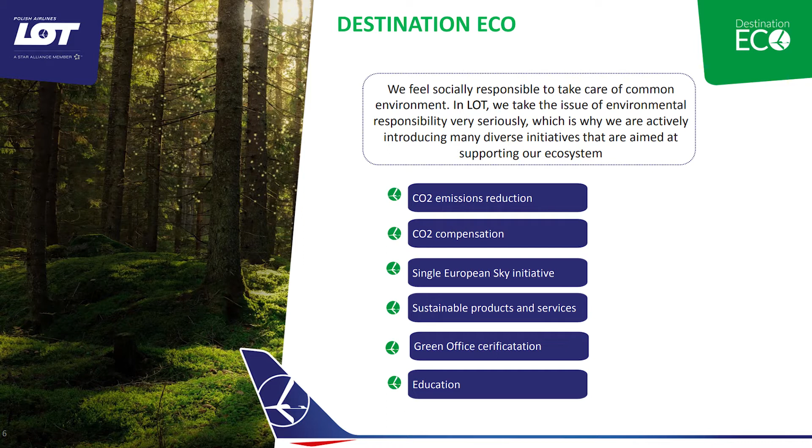Moving then to fuel efficiency. Please let me tell you about the key challenges concerning the fuel efficiency program. As it was mentioned, in 2017 we started implementation of fuel efficiency policy in our company. At the beginning of the project, we established a set of several initiatives that were based on the best practices, things that were already known in the industry, called fuel savers.

The potential savings were only estimation, and it was very difficult to say whether the actions that we had taken were actually working or not. Month by month, as our network and fleet grew, we started to face more and more difficulties in maintaining already recognized initiatives, not to mention implementing new ones. Due to variety of manufacturers, aircraft types, models and many different data sources, data collection became a challenge for us.

We spent most of our time generating data instead of analyzing it. Also, aircraft avionics software are not free from errors, which led us to the point where we weren't able to cover all of our fleet. Another challenge that we were facing was communication with pilots. We believe that pilots are the key players in our fuel efficiency program, and without their cooperation, it is impossible to have a successful fuel program.

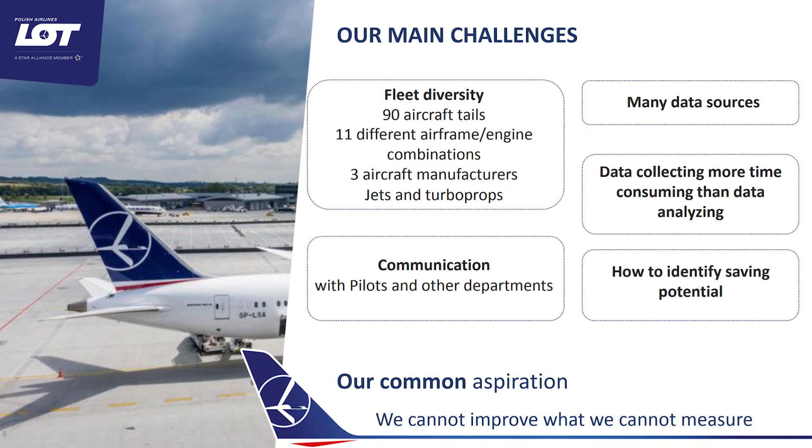However, being aware of the imperfection of the existing solution, we decided to look for a software that would allow us to move the center of gravity from the data collection to data analysis. We were looking for a game changer. To find the best solution that will let us move forward, we established our needs. We needed to monitor our recognized fuel efficiency initiatives and have the possibility of creating self-developed analyses, define targets, goals, and KPIs for compliance monitoring of each initiative. I spoke a lot about troubles with data, so obviously data integration and verification was one of the top priorities.

Engaging pilots in our fuel efficiency program was also high on our list. We wanted to present them their personal results versus others, as well as show areas and ways for improvement. Many of you can probably relate to everything I just said. At the end of the day, we all want a solution that will let us analyze, implement, and improve fuel efficiency initiatives which would lead to actual savings. We all may want the same, but when we go deeper, our needs actually may be slightly different.

That's why we were looking for a software that will give us a possibility of customization. To be honest, we didn't want to buy a box, something that will have some already developed features with no room for changes. All of our needs and more were answered when we met the StorkJet team. As a result, in 2019 we started implementation of Fuel Pro.

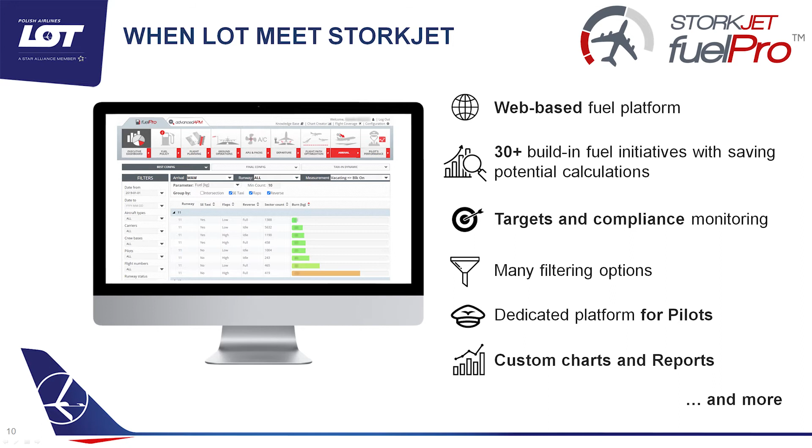Now let me tell you how implementation of Fuel Pro looked at LOT. I can truly describe it with one word: simple. Simple mostly at LOT's side, as our only job was to provide source data of proper quality, and all of the rest of the implementation was done by StorkJet. We provide quite a few data sources, and to be honest, the quality of some of them was far from perfect. Also, the diversity of our fleet meant that we had different needs for every initiative.

Considering the imperfection of our data, StorkJet had to perform a set of quality checks, necessary repairs, and outlier exclusion. After that, they matched all data sources to get one detailed piece of information about a single flight. For each flight, a set of performance indicators were calculated for every fuel efficiency initiative.

At the end, our ultimate goal was to get the highest data quality and coverage possible in one application, and StorkJet definitely met our expectations. StorkJet made the acceptance environment available already during the implementation, so it was possible to see how new data appeared in real time. At the same time, we had the opportunity to comment on the user interface and submit proposals for changes.

It is necessary to mention that the Fuel Pro environment is fully customizable. StorkJet made many individual changes in the platform to suit our fleet, operation types, and network, starting with filtering and validation options, through adding extra charts and new initiatives, ending at the possibility of creating custom charts and reports. The best part is that the time from signing a contract to a fully customized, productive solution was only 5.5 months.

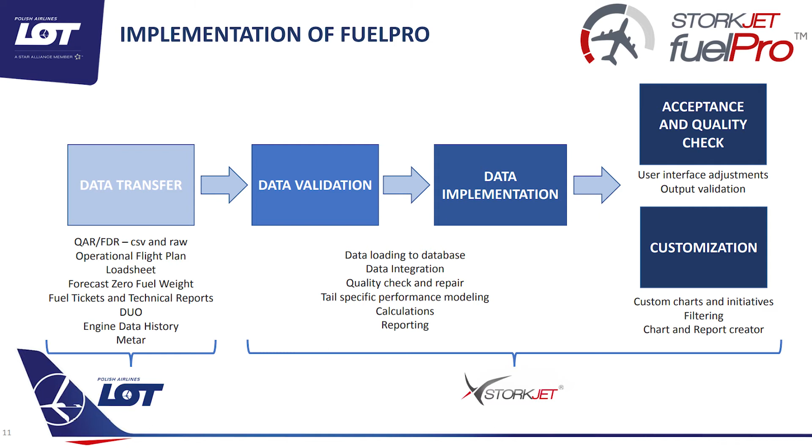Now let me tell you how we use Fuel Pro in LOT and what actual savings we already achieved. I would like to give you a little overview of how we use Fuel Pro in LOT. On a daily basis, Fuel Pro is mainly used by the LOT Fuel team. We measure, track and monitor the progress of fuel initiatives to stay on track and make adjustments when needed.

Because fuel is one of the main costs of an airline, Fuel Pro is a great tool for our management board. Through a dedicated executive dashboard, they can track fuel goals and check actual savings. Fuel efficiency is not only of interest to the fuel department, it also concerns other departments throughout the company. That's why the platform is also used by our chief pilots, fuel efficiency pilot, weight and balance, and flight planning department to let them identify areas for improvement and monitor best practices application.

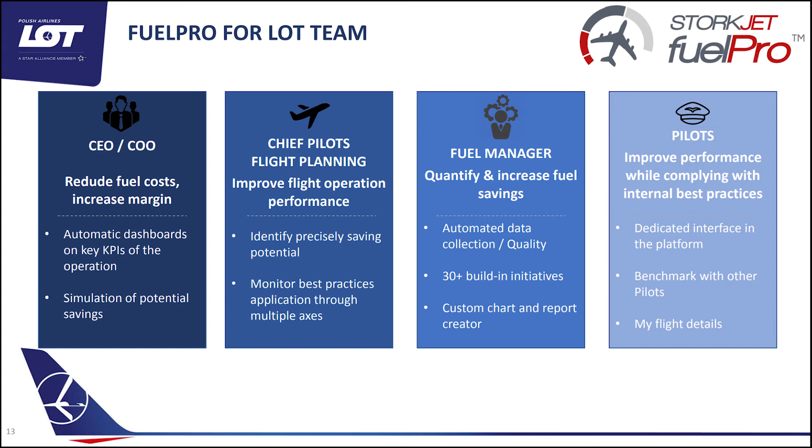And one of the most important groups, pilots. Fuel Pro has a dedicated interface in the platform just for pilots, which I will present in detail in a few minutes. Now jumping into our first case study, contingency fuel. For a quick overview, what is the purpose of contingency fuel? The basic definition states that contingency fuel is loaded for deviation from planned and actual trip fuel.

This is for unexpected factors, like deviation from forecasted weather condition or from planned route. In general, it's planned for deviation between planned and actual demand on fuel.

There are several methods for calculating contingency fuel. Basic ones being 5% of trip fuel, 3% of trip fuel or minimum contingency, reduced contingency fuel, and statistical contingency fuel.

As you can see in LOT, before implementation of Fuel Pro, for our long-haul flights, contingency fuel was planned as 5% of trip fuel.

Because we didn't have a proper software with good quality data to check it, we weren't fully aware of the situation and saving potential. After implementing Fuel Pro, we were able to change our policy and start planning contingency fuel as 3% of trip fuel.

You can see that this change is pretty visible. One year after application, we were able to save almost $2 million.

Implementing 3% contingency fuel is not the end of our story. Our next step is to implement statistical contingency fuel, and I'm sure that with Fuel Pro we will succeed and save even more.

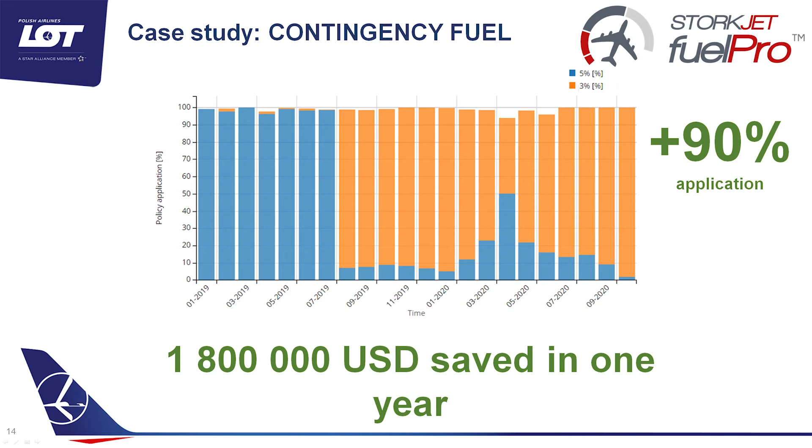Another story that we would like to share with you is about how we reduced APU usage on our 787 and how Fuel Pro helped us with that.

At LOT, we make a significant effort in reducing fuel consumption and in-flight CO2 emission on our long-haul flights. However, once the aircraft lands, we throw all of these benefits and savings out the window with inefficient ground operation procedures. APUs are a great example of that.

We knew that limiting APU usage ensures very significant savings in terms of fuel consumption and maintenance. Unfortunately, our resources weren't enough to analyze FDR data in terms of APU.

For proper monitoring, we wanted to have this data automatically imported in a software that will let us analyze APU usage based on multiple conditions, such as aircraft type, airport, or weather conditions. None of that was possible before implementation of Fuel Pro.

Fuel Pro allowed us to analyze in detail APU usage on each phase: taxi out, in-flight, taxi in, and turnaround. We started with APU usage at taxi in phase in our home base, Warsaw Chopin Airport.

99% of taxi in phases in Warsaw were performed with APU turned on. What is more, in some cases, APU was turned on while the aircraft was still in the air, even when electrically powered ground equipment was available after landing.

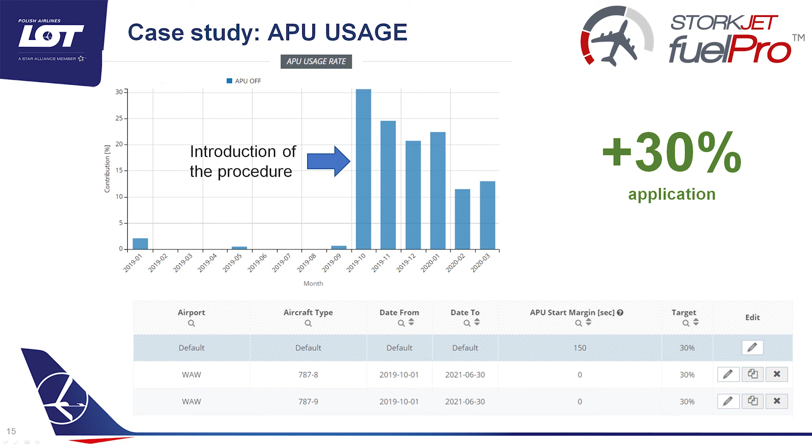On reducing APU usage at taxi-in phase, we were able to save 35 kilograms of fuel on every 787 landing in Warsaw. Our last case study is a great example of how Fuel Pro helped us with an unexpected change in the aviation world.

In LOT, we plan a fixed value of taxi fuel for every aircraft type. We always felt that this is not the most fuel-efficient way of doing it.

But like in previous cases, without a software that would allow us to analyze and, what is more important, monitor application of the changes, we remained with the functioning way of taxi fuel planning.

Even after implementation of Fuel Pro, we didn't change this policy. Knowing it might be time-consuming and savings might not be significant, we left it on our to-do list and focused on the initiatives with higher saving potential.

And then COVID happened. Travel restrictions and flight reduction led to a decrease in airport traffic. Less traffic meant shorter taxi times, and shorter taxi times equals lower fuel consumption.

In Fuel Pro, new data from flight data recorders is implemented to the platform on a weekly basis, so we were able to notice reduction of taxi time and fuel consumption immediately.

Using Fuel Pro custom reports, we were able to check our data flight by flight, compare taxi fuel consumption before and during COVID, divided by aircraft type, departure airports, sectors, time of the day, delays, runways, and weather condition.

It sounds like a lot of work, but actually Fuel Pro did most of this work for us. As a result, we could establish new taxi fuel values not only for every aircraft type, but also distinguished by departure airports. What is more, we can set targets for every airport and check application of this policy.

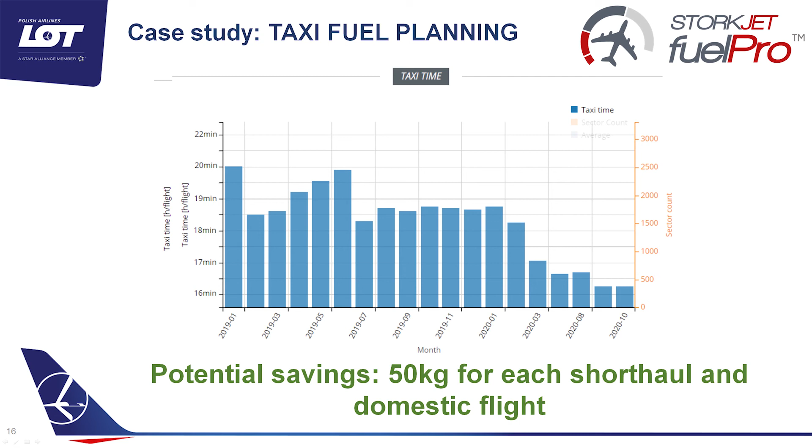At the time of this presentation, the implementation of new policy was not completed, but was in the final phase. However, we would like to share it to show how FuelPro helped us react on time and implement changes as soon as possible. With the new approach, we expect to save up to 50 kilograms of fuel for each short-haul and domestic flight.

Moving on to the last part of our presentation. As we said before, pilots are the key players for a successful fuel efficiency program. Because of that, we wanted to give them a tool with which they could check their achievements and remaining saving potential. With implementation of FuelPro, our pilots received a dedicated platform available for their eyes only.

In FuelPro's Pilot's Performance tab, each pilot can check details about his operation and compliance with cost-saving fuel initiatives in all flight stages. FuelPro allows them to find out how successfully they followed the established fuel policy in a particular month and compare their performance with other pilots.

Also, they can check one of their recent flights to see the route on the map and display the flight details. Additionally, we can create extra charts and make them available for pilots in the platform. What is more, every pilot can check his performance for a chosen sector and aircraft type, which, considering our fleet diversity, is a great feature.

Also for pilots, StorkJet provides an online fuel efficiency manual that lets them understand how the platform works and how to navigate it. Additionally, it provides an explanation of each initiative and shows how it was calculated. This is a great help for us, because most of the pilots' questions could be answered immediately by a simple click in the platform.

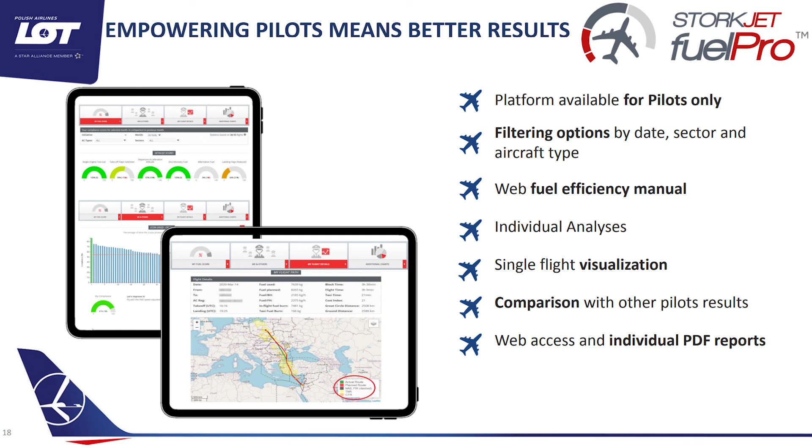For each flight, pilots received a comparison of their flight path with the most optimum one. Optimum is calculated based on StorkJet's tail-specific performance model using artificial intelligence.

By comparing the most optimum flight path with the real one, pilots can check where the areas for improvement are and what the saving potential is in every minute of the flight. Such charts are available for climb, cruise, and descent.

On the example, we can see the descent chart. The actual flight profile is marked in blue, the optimal in green. The first picture shows pressure altitude, the second shows indicated airspeed, and the third shows fuel usage.

By analyzing such charts, the pilot can see that top of descent started too late. This is why the aircraft was flying too fast, and in the end, the pilot had to use speed brakes to come back to the appropriate profile, with a saving potential of 73 kilograms.

As far as now, every opinion about FuelPro that pilots share with us is a positive one. Nothing makes me happier than the fact that they are willing to use it and change their performance to be more fuel efficient and eco-friendly. So I think I'm safe to say that from both an analytical and a pilot's point of view, we highly recommend this solution.

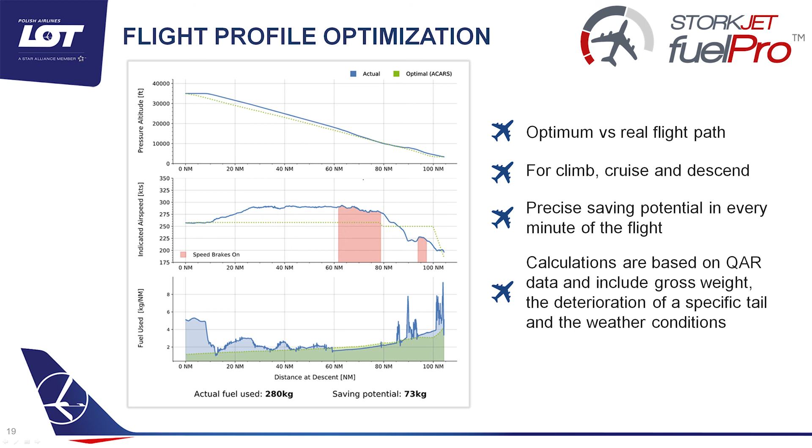For LOT Polish Airlines, StorkJet's fuel efficiency software has been an eye-opener. Now we are able to track our fuel efficiency initiatives and develop new ones. We have a powerful analysis tool that collects all fuel data from various sources into one application. With FuelPro, we are able to discover new fuel-saving possibilities and successfully implement them. By sharing FuelPro with pilots, we are engaging them to fly more efficiently and be greener. They are much more aware of their performance and ways of improvement. And this is just the beginning.